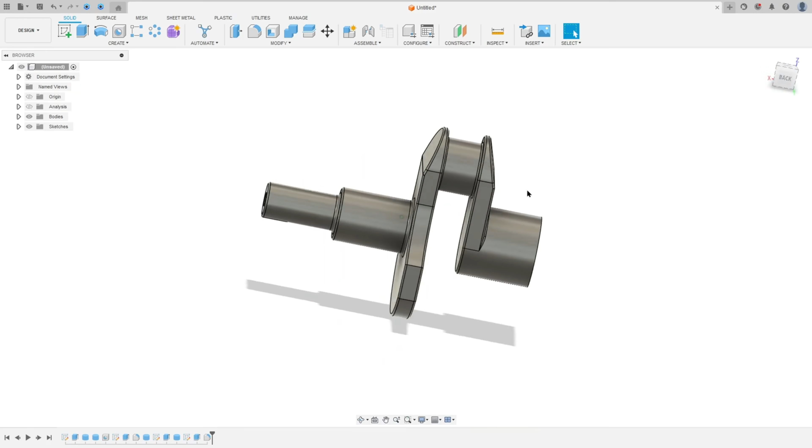Let's make one more tutorial in Autodesk Fusion. In this video, you'll learn how to create this crankshaft, and you'll learn how to use the extrude, cylinder, hole, fillet, and extruded cut in Autodesk Fusion. So open Fusion and let's go.

The first step to create this crankshaft, we will select the right plane and make this sketch here. This sketch is from this part here. So let's create this. Here will be our midpoint. The first thing we make here is create this construction line with 40 millimeters and create this arc here with

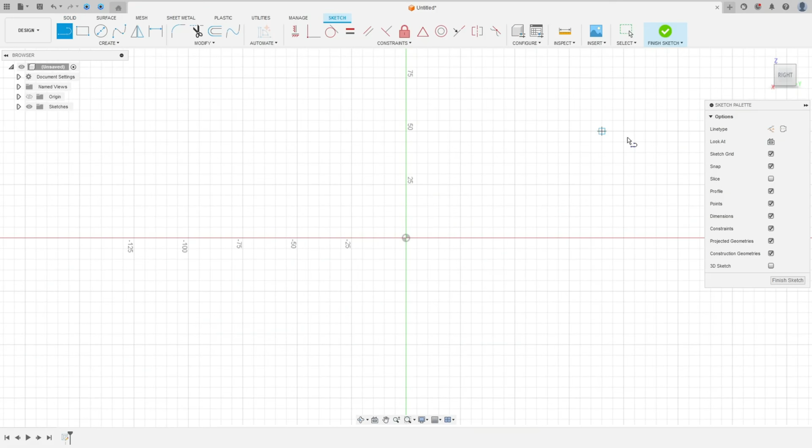20 millimeters of radius. So open Fusion, go to create a sketch, select the right plane, select a line, a construction line, make a construction line here with 40 millimeters, and go to create, select arc, center point arc, remove the construction line type. The radius here is 20 millimeters. Make an arc here. We made this.

Now let's create this arc here. The center of this arc is the midpoint, and the radius 50 millimeters, and the distance between these 2 points here is 80 millimeters.

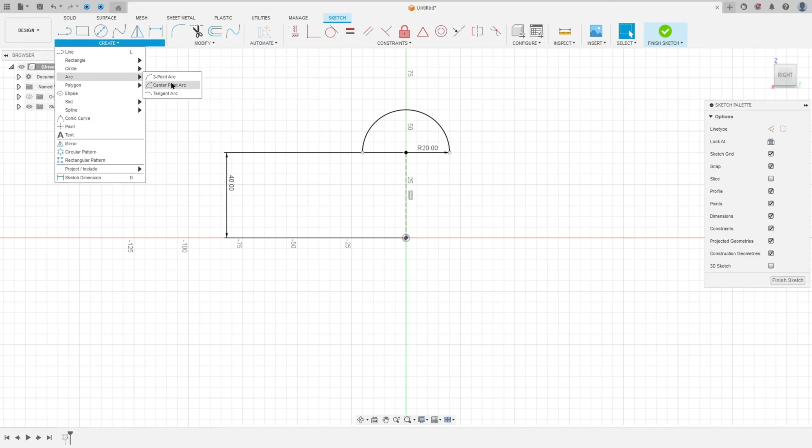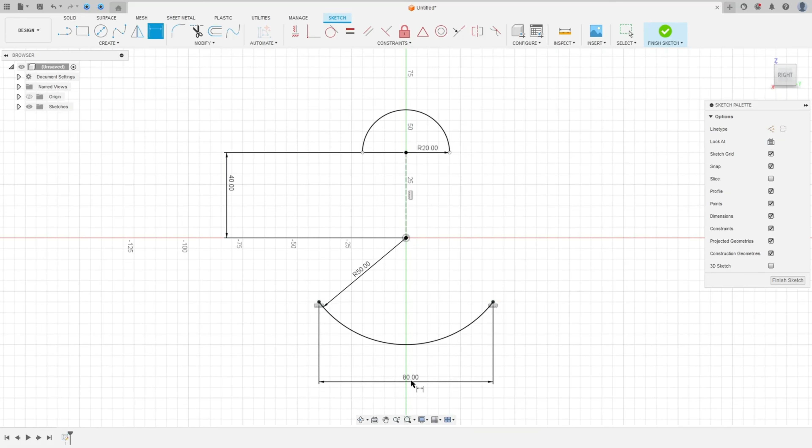So go to create, select the arc, center point arc, click at the midpoint here. The radius here is 50 millimeters. Make an arc here. Go to constraint, select horizontal vertical, select these 2 points here, and go to sketch dimension. The distance here is 80 millimeters. We made this.

Now let's create this sketch here. We'll put the dimensions later. So select line, make a line here, make an arc here, and make another line here.

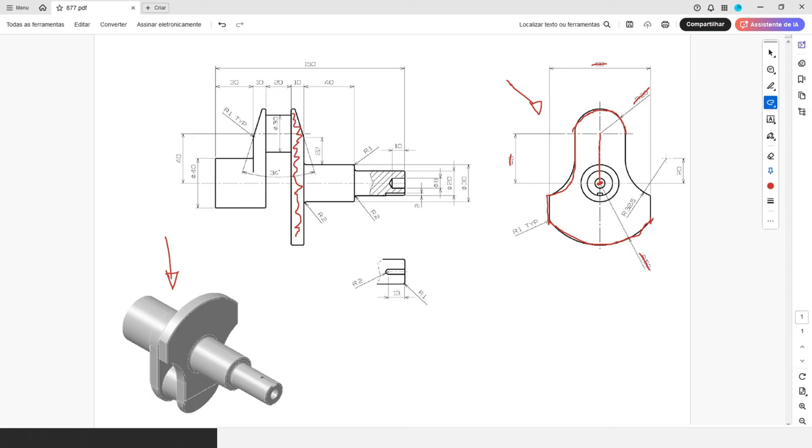The radius of this arc here is 32.5 millimeters, and the distance between the center of this arc and the midpoint is 20 millimeters. So go to sketch dimension. The radius here is 32.5, and the distance between this point and this point here is 20 millimeters.

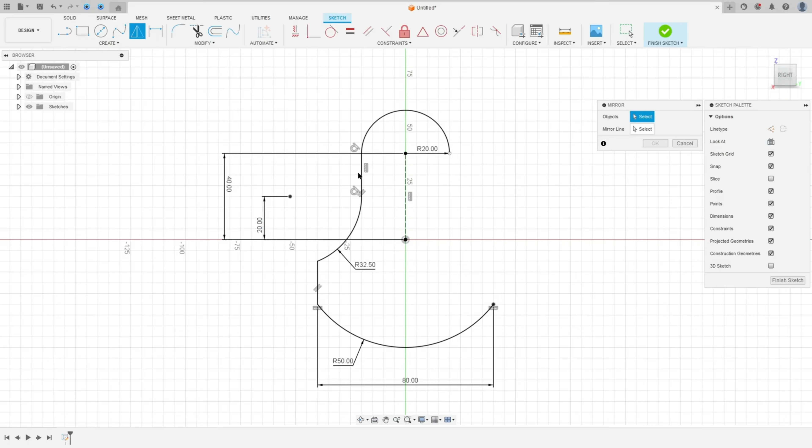We made this. Now go to create, select mirror, select this line, this arc, and this line here. Select the mirror line. The mirror line is this construction line, and press OK. We made this.

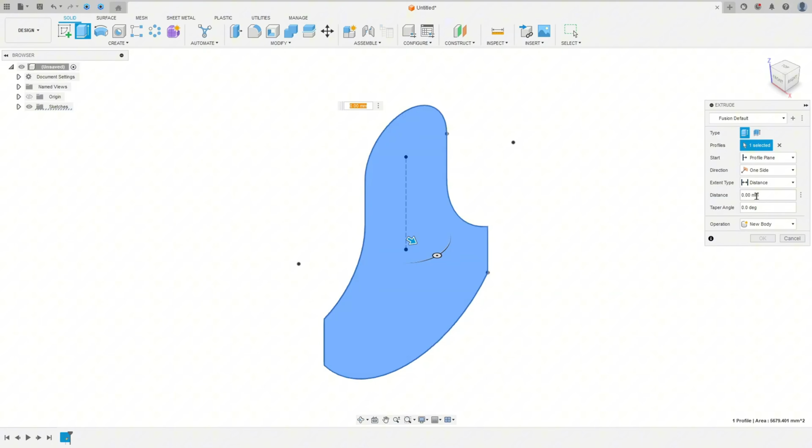Now finish the sketch. Go to extrude. We need to extrude this 10 millimeters. So the distance here is 10 millimeters. Operation new body, press OK.

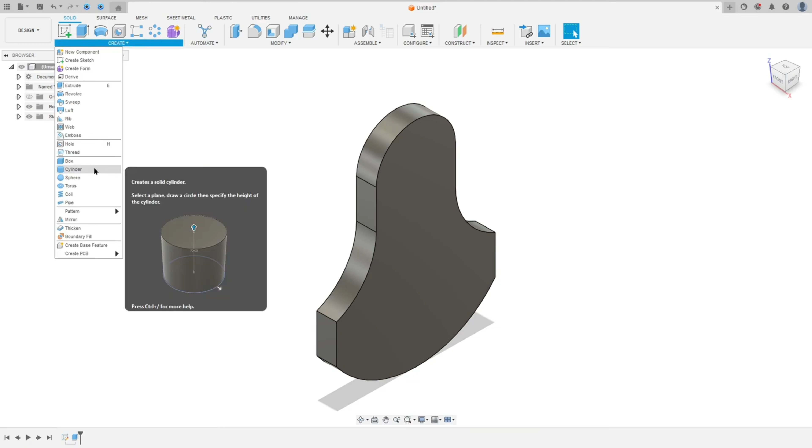We have a cylinder here, so let's create this. This cylinder here has 30 millimeters of diameter and 40 millimeters of length. So go to create, select cylinder, select this face here, click at the midpoint. The diameter here is 30 millimeters, and the length here is 40 millimeters. Operation join, press OK.

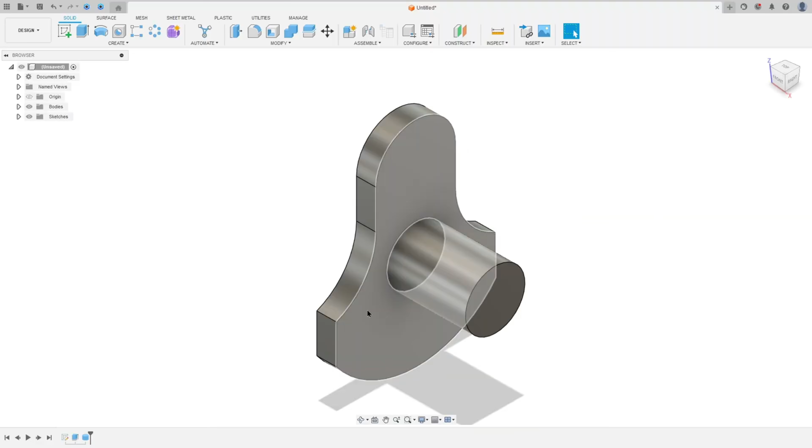Now let's create another cylinder here. This cylinder has 20 millimeters of diameter, and the length here is 40 millimeters. Go to create, select cylinder, select this face here, click at the midpoint, the diameter 20 millimeters, and the extrusion here 40 millimeters. Operation join, press OK. We made this.

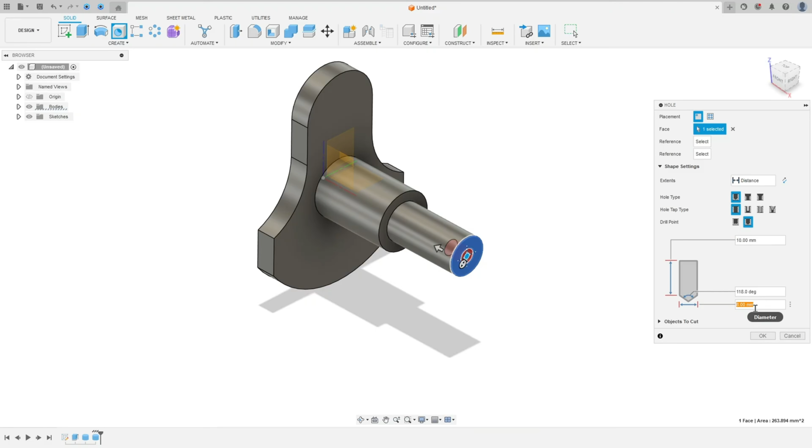Now let's create this hole here. This hole has 8 millimeters of diameter, and the depth here is 10 millimeters. So go to create, select the hole, select this face, select the edge reference in this edge here, the depth 10 millimeters, and the diameter 8 millimeters. Press OK. Let me show you.

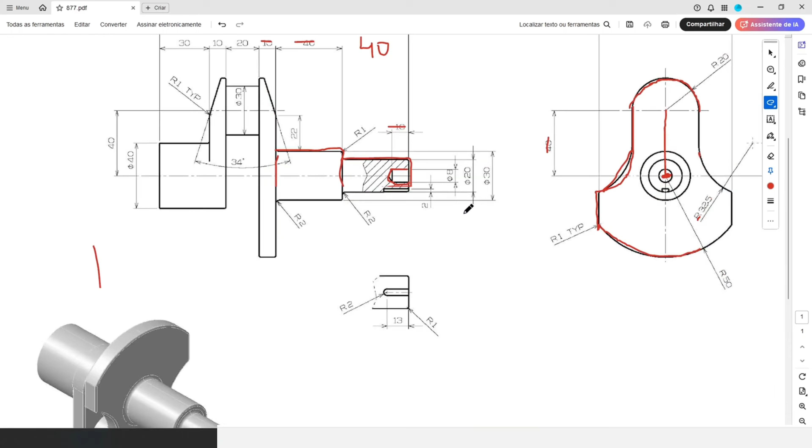We made this cut here in this hole. Now we need to create this cut here, this one here. Here we have the distance here, 2 millimeters. So we have 2 millimeters here. Let me show you, 2 millimeters here. And the length here, the distance here is 4 millimeters. And we needed to make a cut here, 13 millimeters plus 2 millimeters of radius, so 15 millimeters, okay?

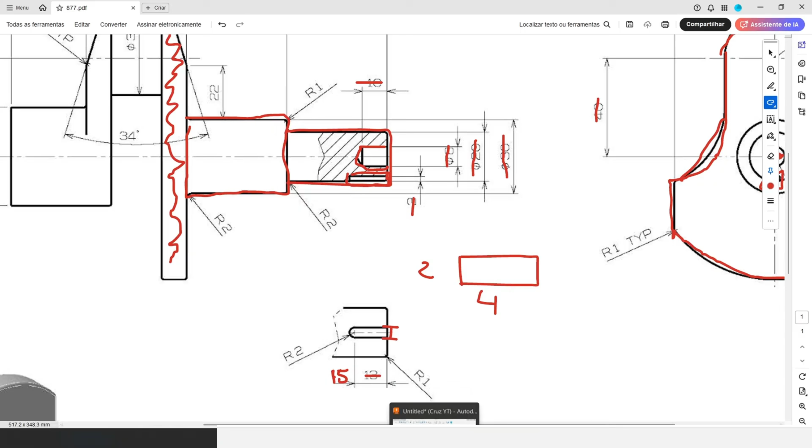So open Fusion, go to create a sketch, select this face here, go to create, select the Project Include, Project, select this edge here, press OK, hide this body, go to create, select the 2-point rectangle, center rectangle, make a rectangle here 4 millimeters by 2 millimeters.

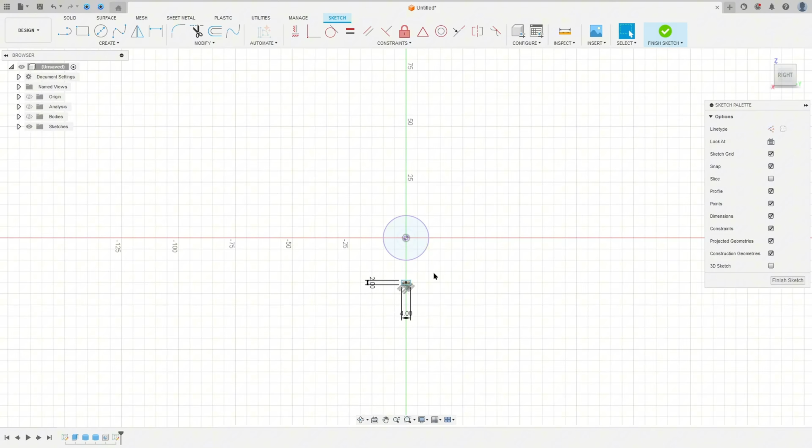Go to constraint, select horizontal vertical, select this point and this point here. And go to constraint again, select tangent, select this line here and this circle. And press OK. Show the body here.

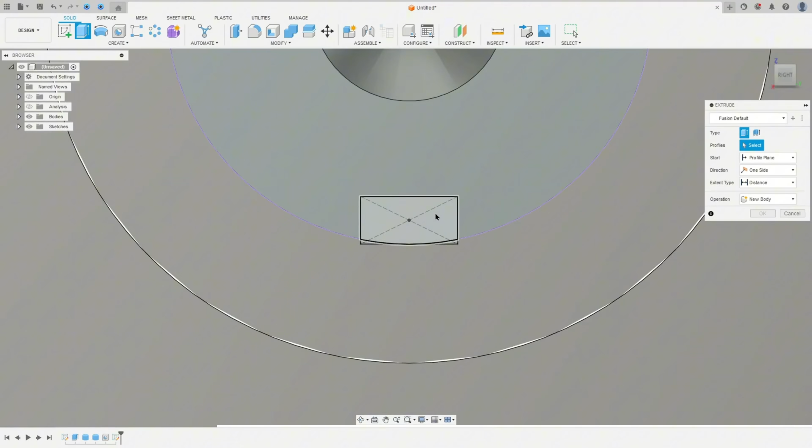Go to extrude, select this profile. We needed to make a cut here with minus 15 millimeters. Operation cut, press OK. We made this cut here.

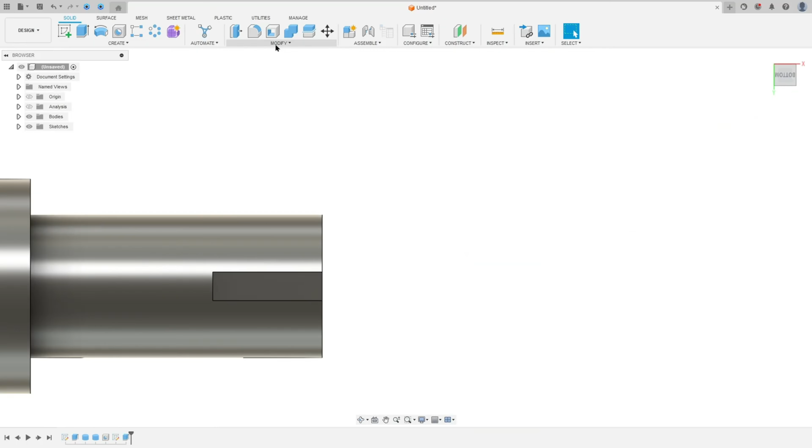Now we needed to add a fillet here with 2 millimeters of radius. So go to modify, select fillet, select this edge here, and select this edge here. The fillet here is 2 millimeters, and press OK. We made this, okay.

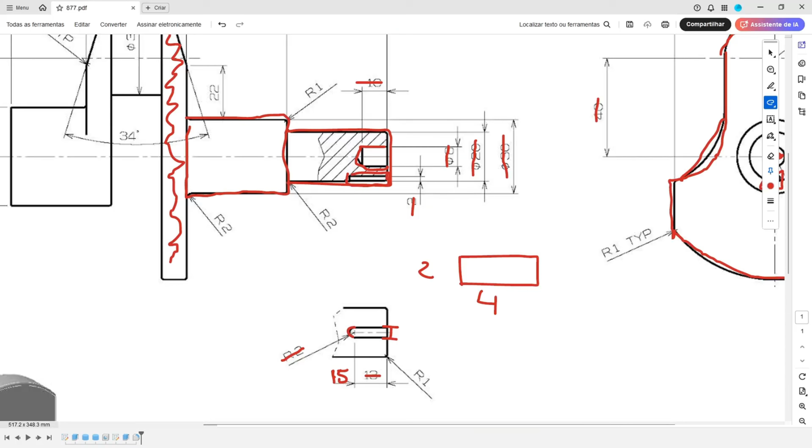Now let's create this cylinder here with 30 millimeters of diameter and the length 20 millimeters. Go to Create, select Cylinder, select this face here, find the center of this arc here. When you see this symbol, this circle, that means it is in the same center of this arc.

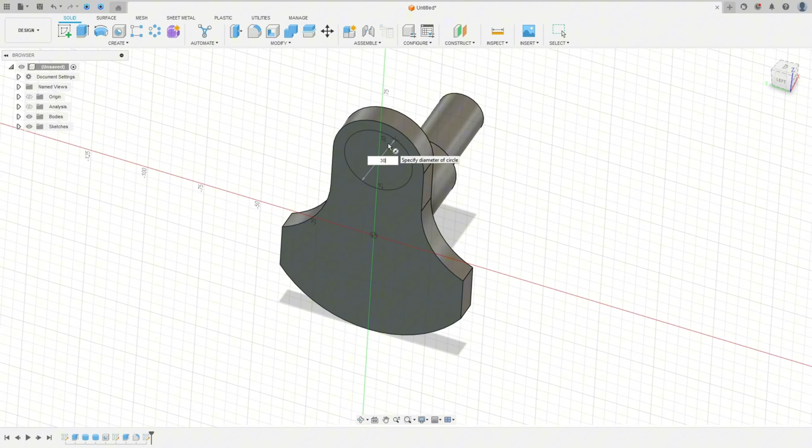The diameter here is 30 millimeters, and the extrusion here is 20 millimeters. Operation join, press OK.

Now we need to create this part here. It is similar to this one, but here we have a cylinder here. So here in the sketch, we'll have a circle here, we'll have a line here, tangent, and a circle here. This circle here has 40 millimeters of diameter. Let me show you.

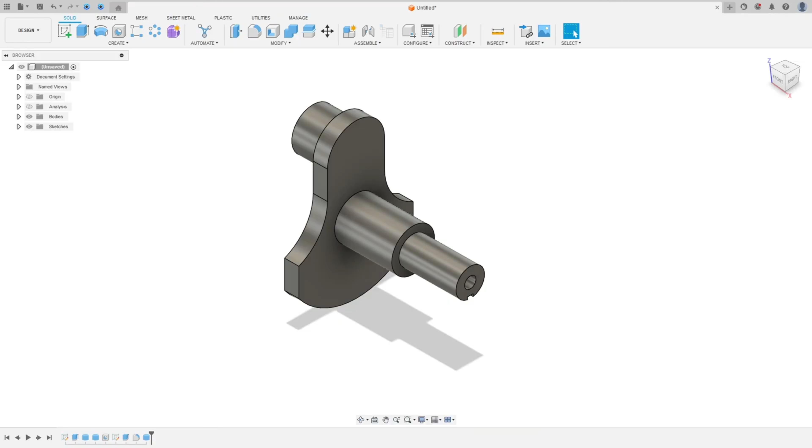Go to Create a Sketch, select this face, go to Create, select the Project Include, Project, select this face here, press OK. Now select the circle, click at the midpoint, make a circle here with 40 millimeters.

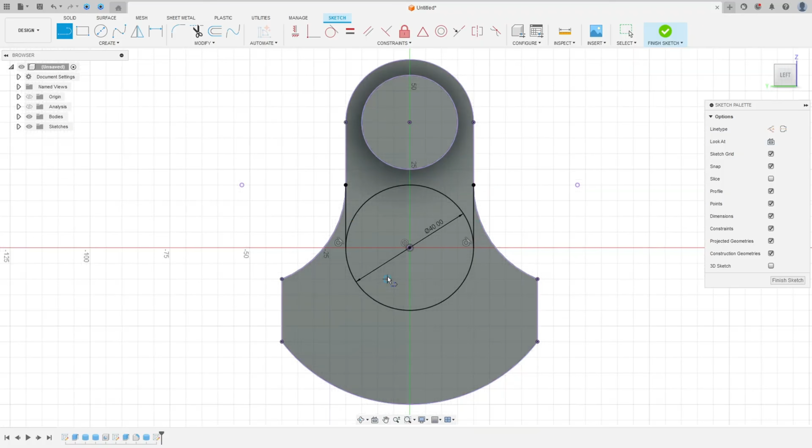Now select the line, click at this point, make a line here, tangent with the circle, the same here. And finish the sketch. We have this profile here.

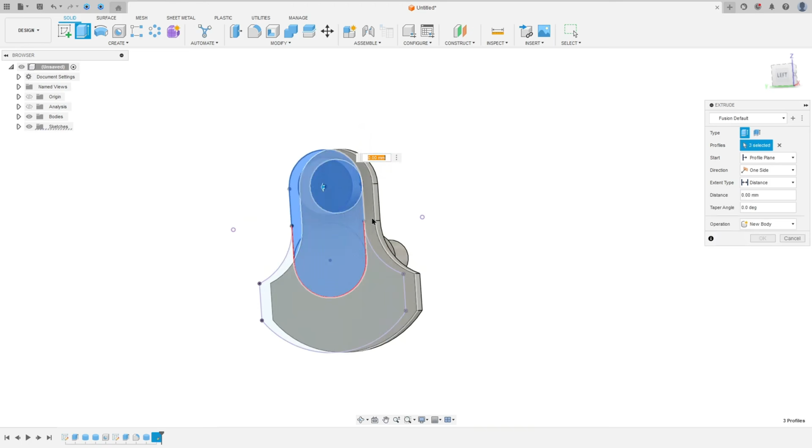So go to Extrude. We need to extrude this 10 millimeters. So select this circle, this profile here, and this circle here. We need to extrude this 10 millimeters. Operation join, press OK. We made this.

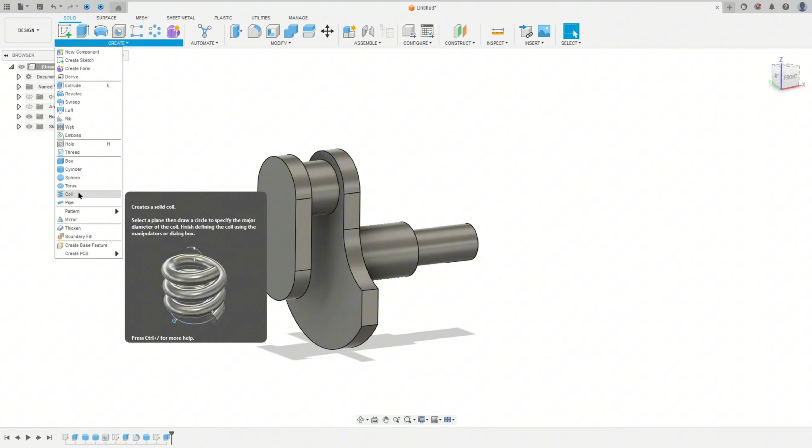Now we need to make this cylinder here, 40 millimeters of diameter and 30 millimeters of length. So go to Create, select Cylinder, select this face, select the midpoint here, 40 millimeters of diameter, and the length here is 30 millimeters. Press OK. We made this.

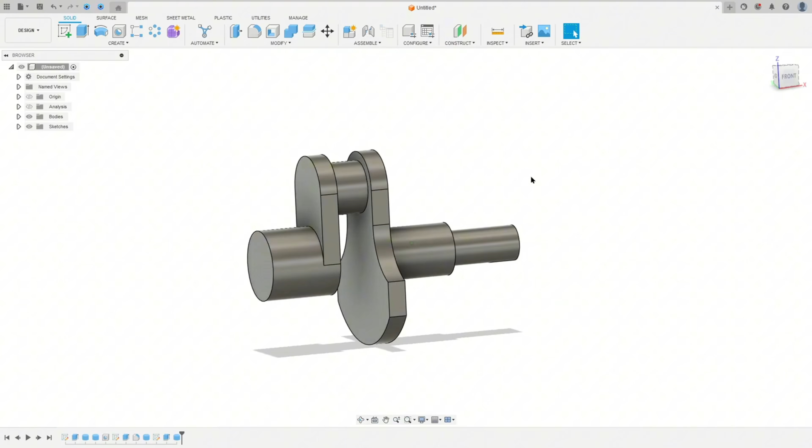Now let's make this cut here. Let me erase all this red lines here. We need to make this cut.

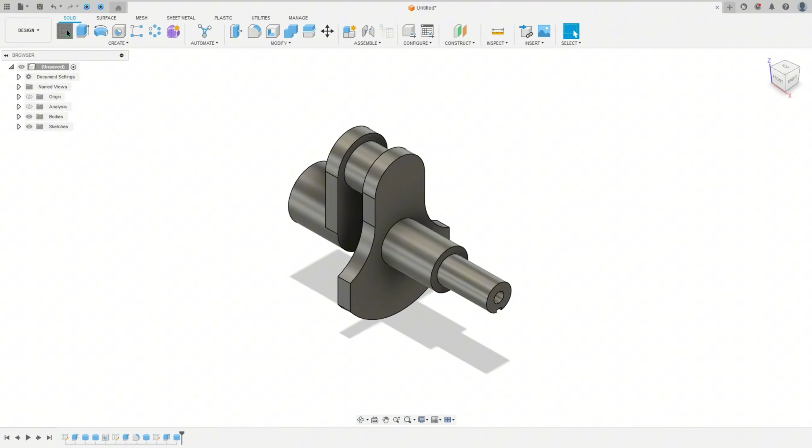This cut here, we'll go to create a sketch, select the right plane, the front plane, sorry. Go to create, select the project, include project, the selection filter, select the bodies, select this body here, press OK. I will hide this body a little bit.

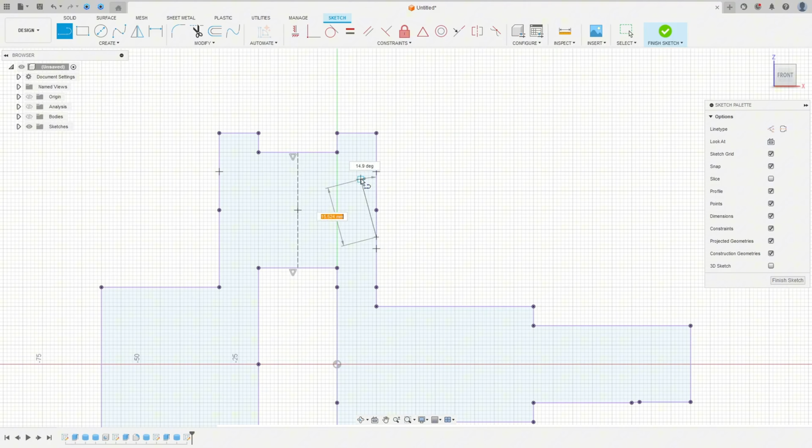We have this. Now select the line, construction line, select the center of this line here, make a line here. Remove the construction line type and click at this line and this line here. We made this line.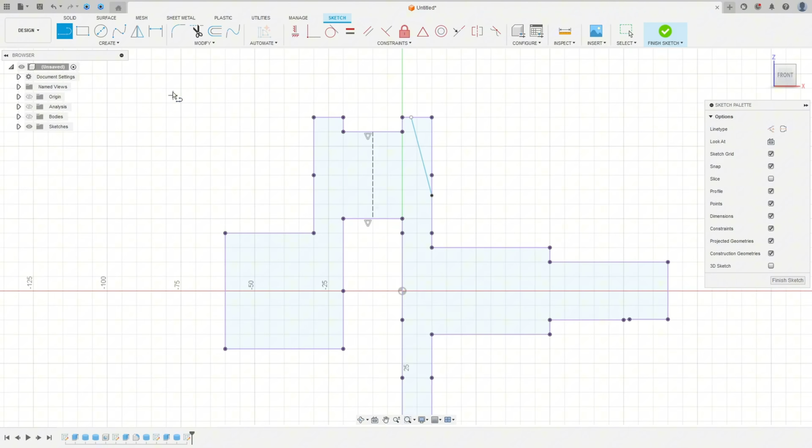The angle between this line here and the construction line is a half of 34 degrees, so it is 17 degrees. Go to sketch dimension, the angle here 17 degrees,

and the distance between this point here and this line here is 22 millimeters. Select this point, this line here, 22 millimeters.

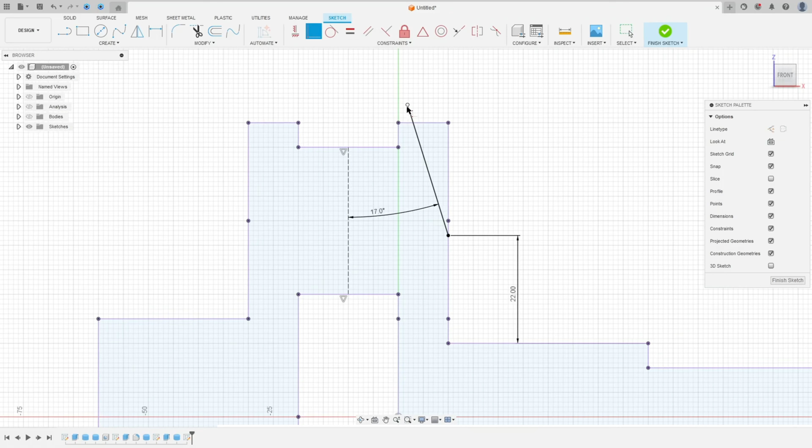Let me make this point coincident with this line here. Now go to create, select mirror, select this line. The mirror line is this construction line, press OK.

We have these two profiles here that we'll use to make a cut. So finish the sketch, go to extrude, select these two profiles here, show the bodies here.

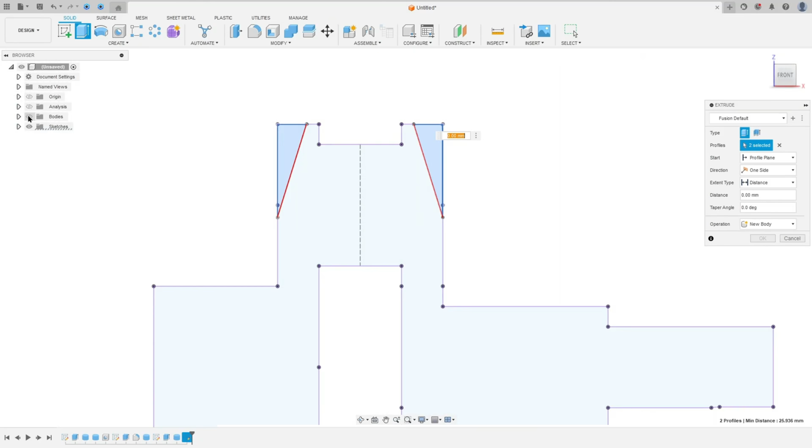The direction, select symmetric, the extent type, select all. We'll make this cut in both sides and press OK. We made this.

Now we need to add the fillets. So here in this edge and in this edge, we have a fillet with 2 millimeters of radius.

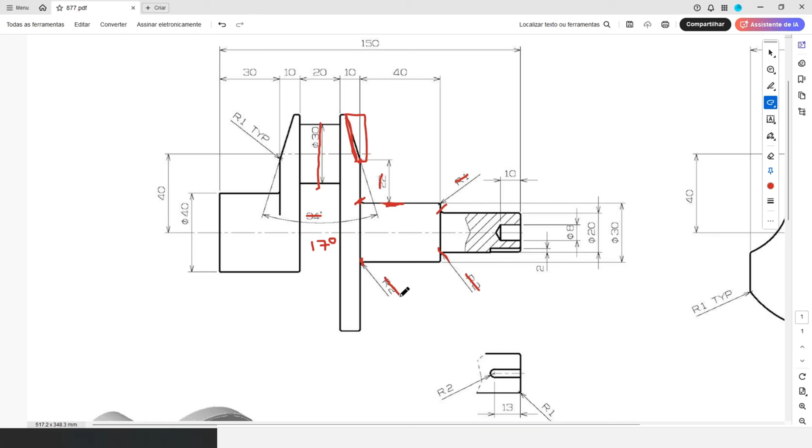So go to modify, select the fillet, select this edge and select this edge. The fillet here is 2 millimeters. Now add selection set. The fillet here in this edge, this one, it's 1 millimeters, okay?

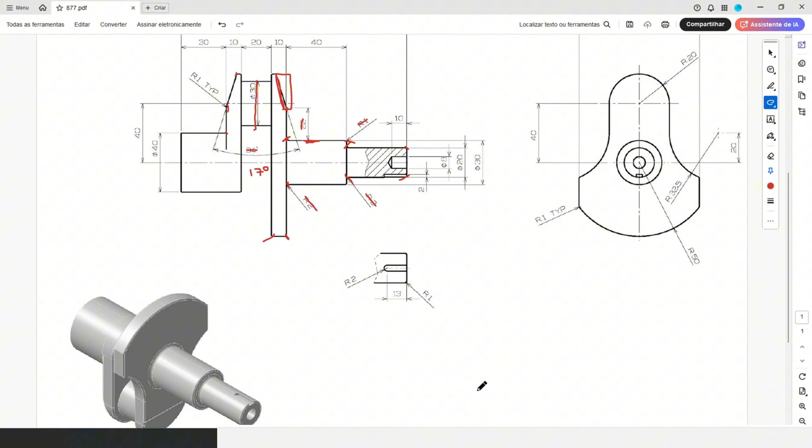Here we don't have a fillet, so let's create this. And we have a fillet here with 2 millimeters of radius.

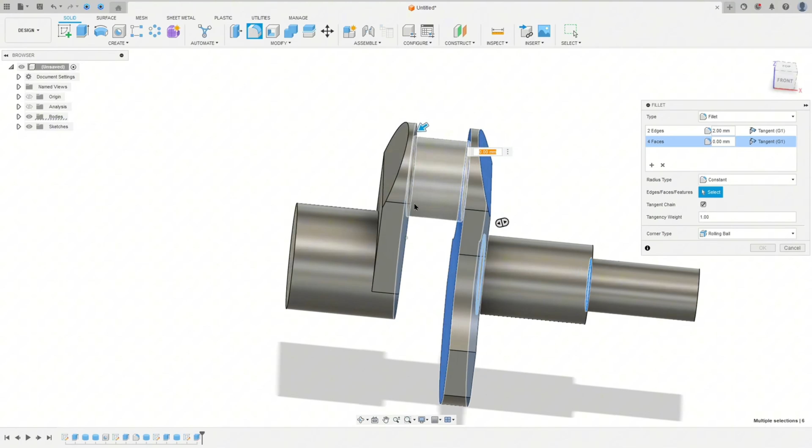Select this face here, this face, select this face here, select this face here, this face and this face. The fillet here is 1 millimeters.

Add selection set, select this edge and this one. The fillet here is 1 millimeters. And that's it. Press OK.

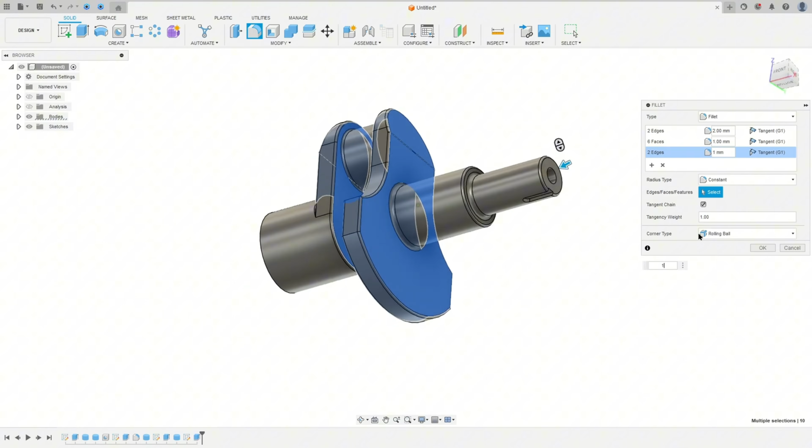And here we finish your exercise.